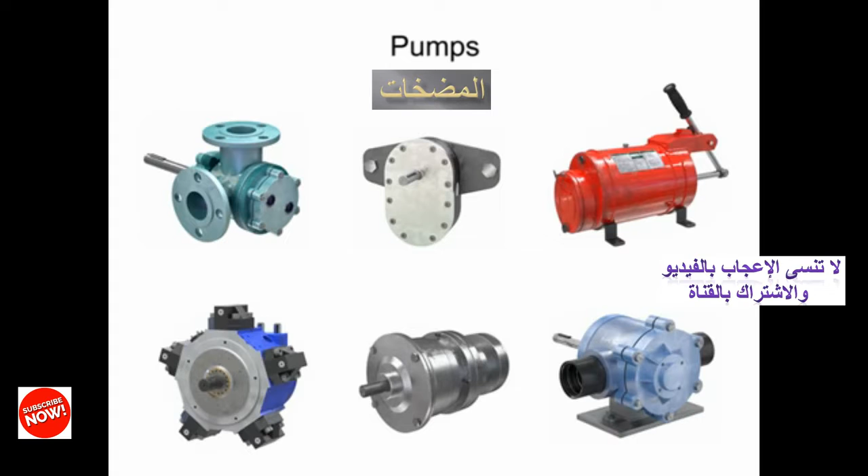Many different types of pumps exist to assist fluid movement in a variety of systems. An external gear pump uses two gears rotating against each other to provide fluid movement.

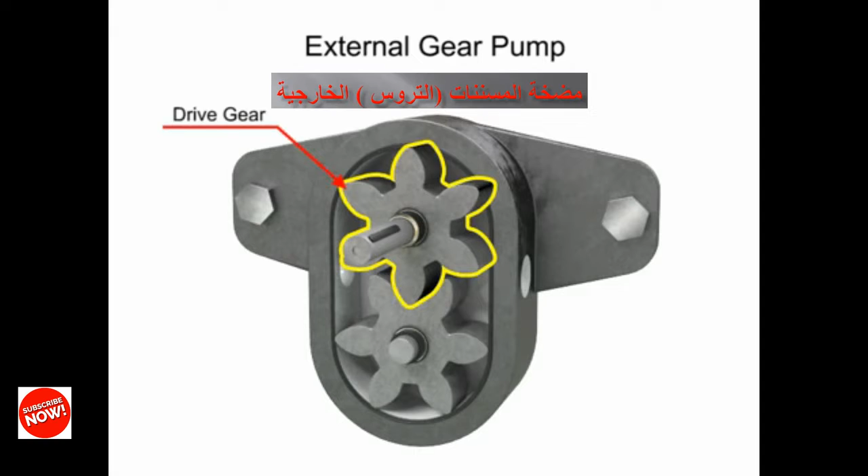One gear is driven by a motor connected to a shaft. This is called the drive gear because it is driven by a motor, and it in turn meshes with and drives the movement of the second gear.

As the gears rotate away from each other and come out of mesh, they create an expanding volume on the inlet side of the pump. This creates a vacuum at the inlet port, allowing fluid to flow into the pump. Then fluid flows into the cavities and is trapped by the gear teeth.

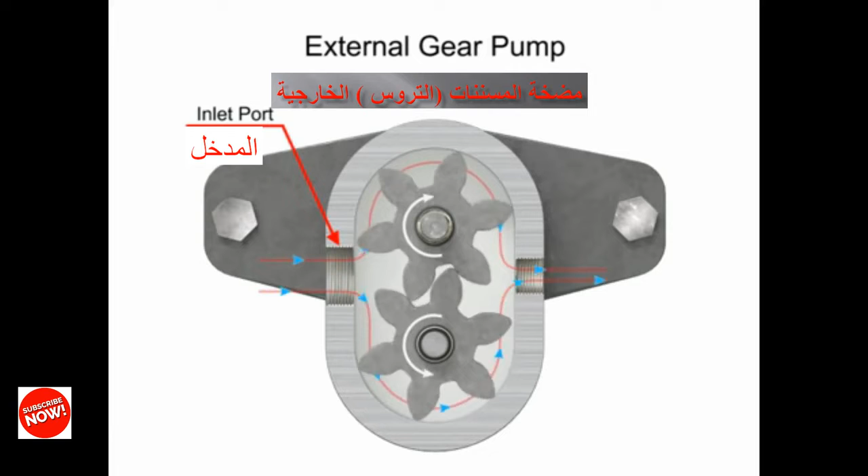As the gears rotate, a flow path is created around the outside of each one. Fluid trapped in the slots between teeth is carried around and discharged into the cavity with the outlet port. Meshing of the teeth in the center of the pump seals the outlet port from the inlet port. No fluid passes between the gears.

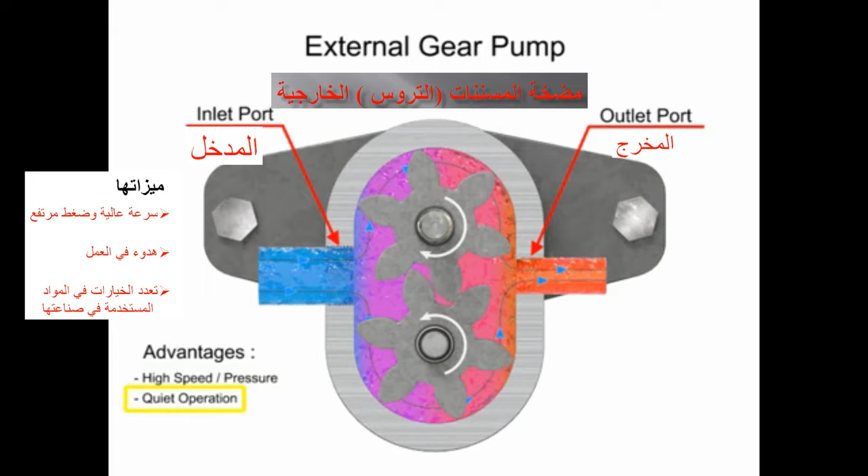The advantages of external gear pumps are their high speed and pressure, relatively quiet operation, and that their design accommodates a wide variety of materials. Disadvantages include bushings in the liquid area can become worn and that they have fixed end clearances.

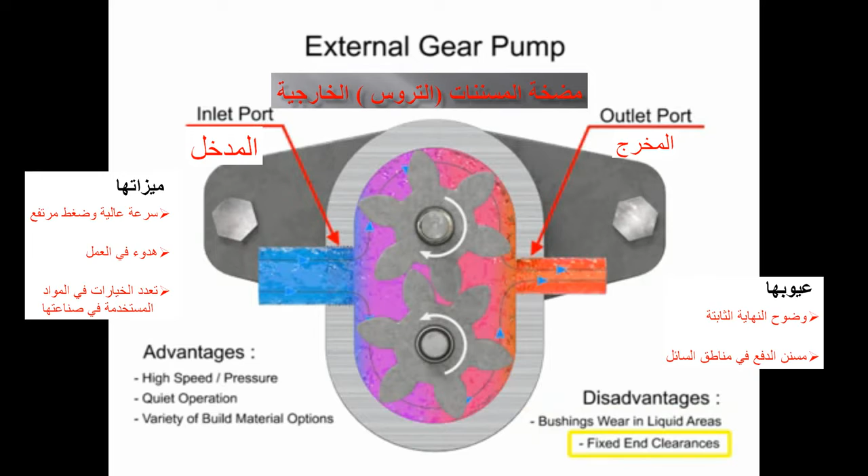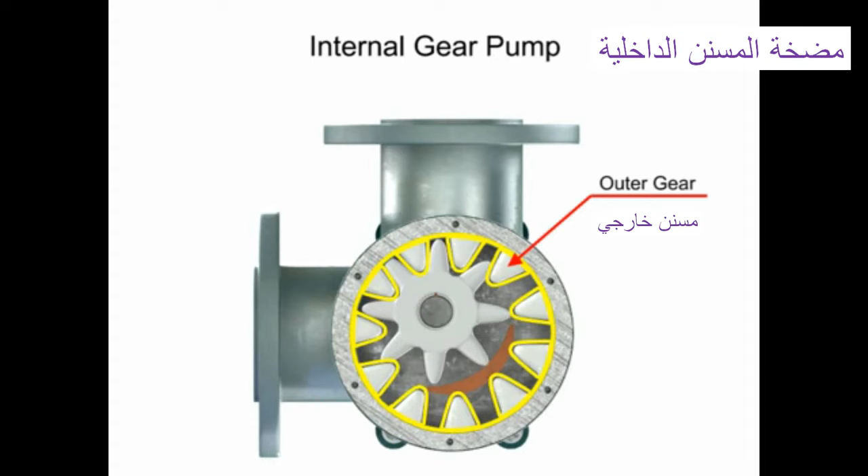Internal gear pumps are exceptionally versatile. This type of pump has one inner gear which is inside a second outer gear. The inner gear has a shaft driven by a motor and has teeth that protrude outward. The outer gear has teeth that protrude inward toward the center of the pump.

As the inner gear rotates, it meshes with and moves the outer gear. Liquid is trapped in the gear spaces and carried from the inlet to the discharge. A stationary crescent-shaped divider separates the intake and discharge portions of the fluid.

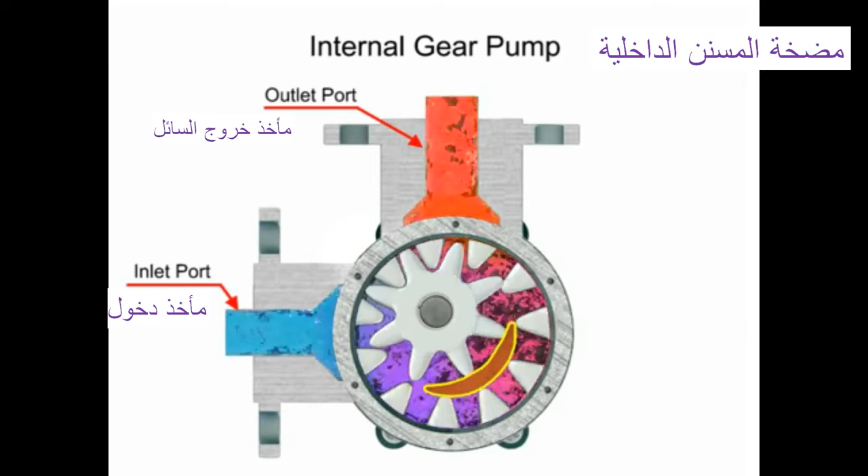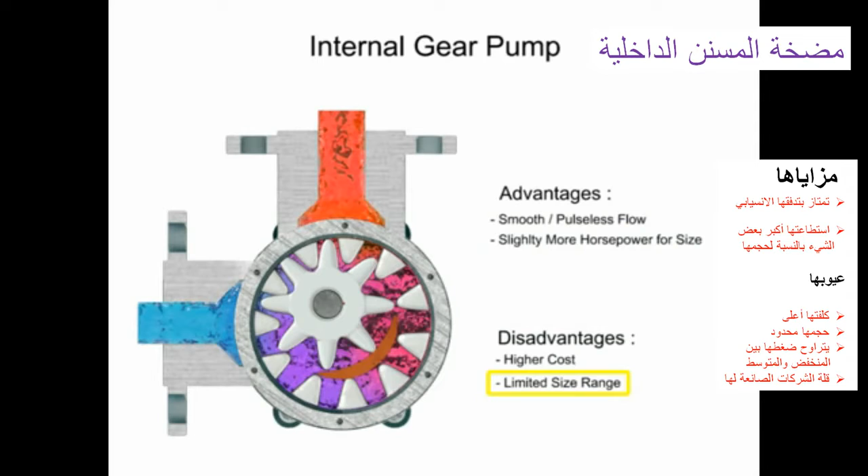Advantages of internal gear pumps are a smooth and almost pulseless flow, and slightly more horsepower for its size. Disadvantages are its higher cost, limited size range, low to moderate pressure ratings, and few sources of manufacture.

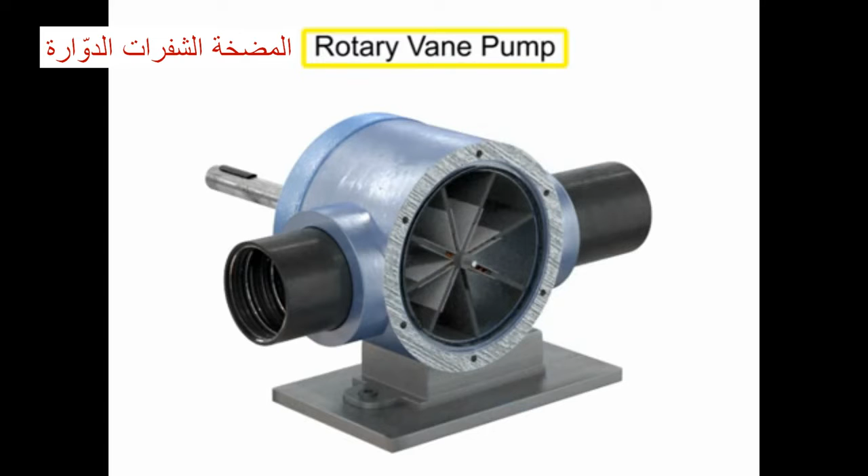A rotary vane pump is a positive displacement pump that consists of vanes mounted to a rotor. The vanes are on an off-center drive shaft. As the shaft rotates, the variable length vanes slide in and out to maintain contact with the pump housing. The tension in the vanes is maintained by either springs or hydraulic pressure. As the vanes rotate, they create chambers of varying sizes within the pump.

Fluid enters at the largest chamber. As the vanes rotate and retract, the chambers get smaller, forcing fluid to exit through the discharge port.

The advantages of vane pumps are that they can handle low viscosity fluids at relatively higher pressures, can dry run for short periods, and develop a good vacuum. Their disadvantages include complexity and their unsuitability for both high pressure and high viscosity fluids.

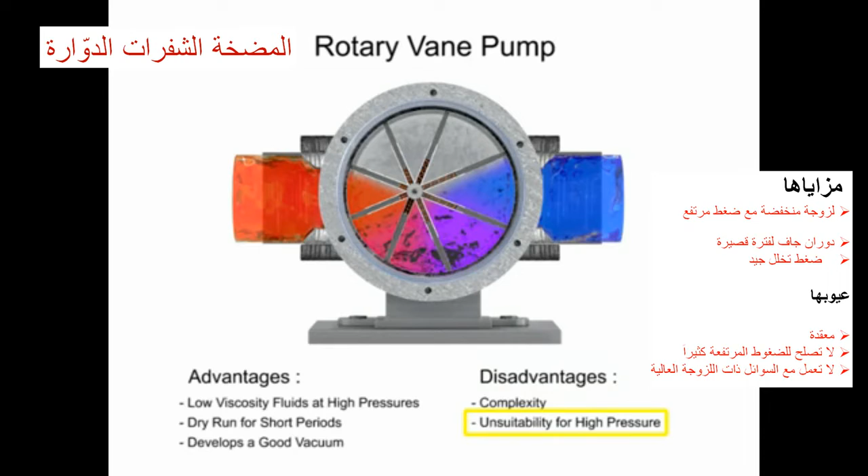Piston pumps come in many different forms. A swash plate is a device used to translate the motion of a rotating shaft into the reciprocating motion of a piston. Swash plate piston pumps have a rotating shaft connected to a cylinder block containing pistons, which are pressed against a stationary swash plate that sits at an angle to the cylinder.

As the shaft rotates, the pistons move against the swash plate, causing them to reciprocate within the piston block. The pistons create a vacuum that forces fluid in during half a revolution and expels fluid during the other half.

On the intake stroke, a spring ensures the pistons pull back and maintain contact with the swash plate, causing fluid to fill the empty cavity left behind. On the discharge stroke, the angle of the swash plate forces the pistons back inside the piston block and discharges the fluid. The greater the slant on the swash plate, the further the pump pistons move and the more fluid they transfer.

Piston pumps, in general, are manufactured with closer internal fits than other pumps. This means that internal slippage can be less so that they operate with reasonable efficiency at pressures both too high or too low for the operation of other pumps.

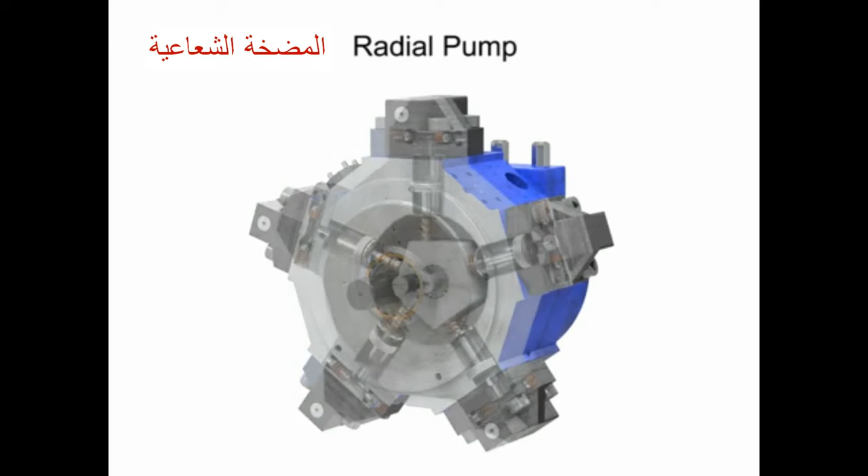Radial pumps are designed so the pistons stroke in a direction at right angles to the shaft. The pistons are arranged like wheel spokes around a cylinder block with an eccentric central cam mounted on a drive shaft.

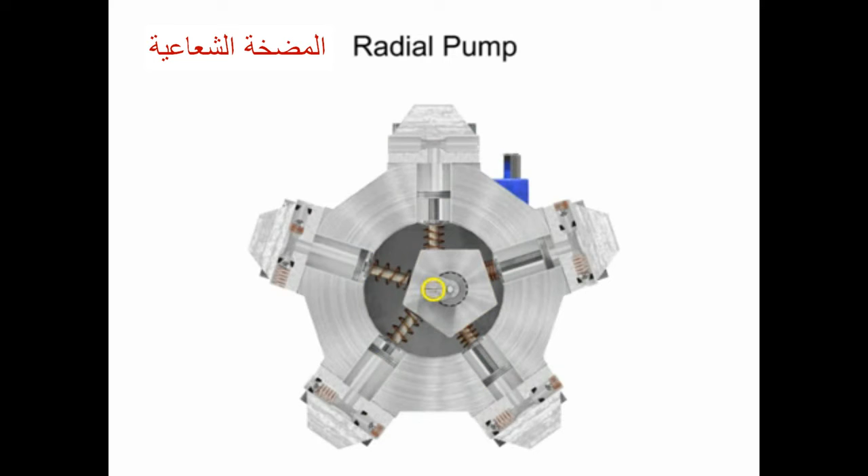As the shaft rotates, the cam moves towards the pistons, forcing them down into the cylinder block and discharging the fluid. As the cam moves away, springs help retract the piston and cause the intake stroke. Check valves ensure that fluid only enters the inlet ports and only exits the outlet ports.

Radial piston pumps have a low noise level, very high loads at low speeds, and high efficiency.

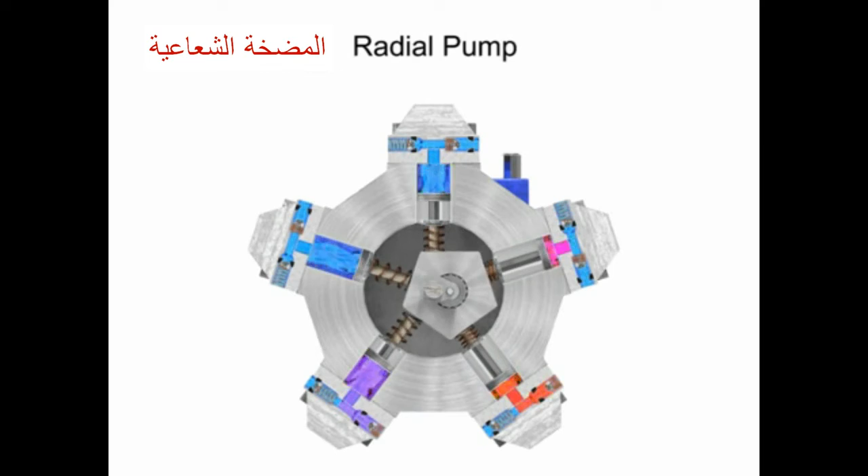Hand pumps are used when a source of power is not available or where the extra expense of a power pump isn't warranted. For example, they are used on shop presses and other portable equipment, serve as standby pumps, and serve as sources of emergency power.

Hand pumps are always of piston type and are usually constructed with a piston working between two check valves.

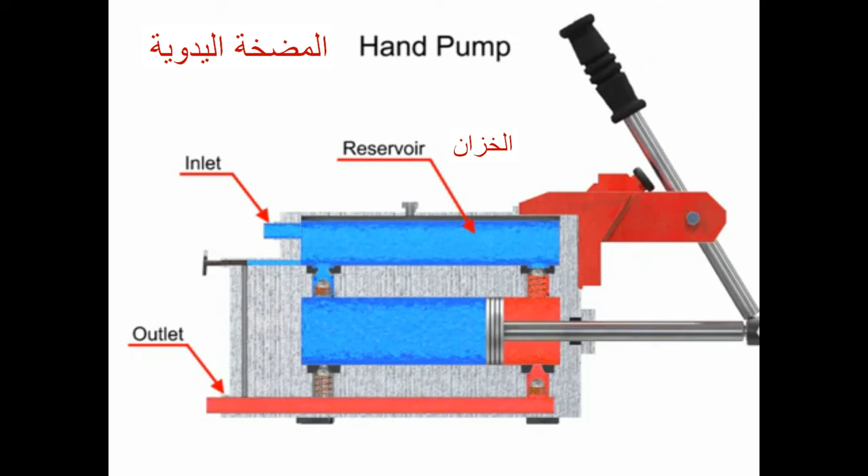Double-acting hand pumps are more efficient, allowing fluid to both enter and discharge on both strokes of the piston. Moving the pump handle in either direction allows fluid to be drawn in from the reservoir and discharged via the outlet ports. Check valves in all locations prevent fluid backflow.